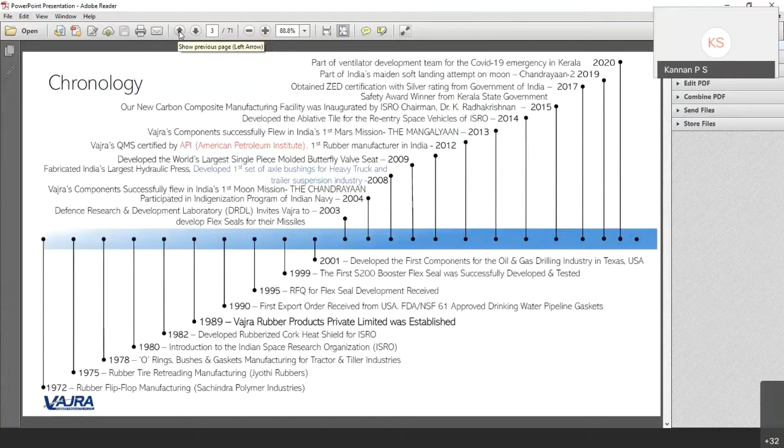Then we graduated into making bigger items, metal-to-rubber bonded items, like that. Two to three years passed, and we got an opportunity to develop something nobody had ever done before — what we can call a flexible seal, which was being imported from Europe at the time. Finally, our company managed this over about 4 years, and after that we could do what we can do now.

So that was a big thing for our company — showing that things can be done. Even when we were making chappals, my father had this belief: whatever you do, you should do it with passion and full confidence, and try to do it the best. That's what took him to the next level of trying to make components for aerospace.

Now I can proudly tell you, our GSLV rockets and PSLV rockets are all fitted with our components — without them, none of these launch vehicles can fly. So that is one component.

Now we are into different components in that launch vehicle altogether — some hundreds of components we are making. But that was the main start, making the special flex seals for that. Also, taking cues from aerospace, even our missile industry in Hyderabad, the Abdul Kalam Center for Missiles — we work very closely with them too, and there also these seals are required to give direction for our missiles, like Akash and different kinds of missiles. So now we almost cater to 21 different types of missiles, ballistic and intercontinental missiles — these are all fitted with our components.

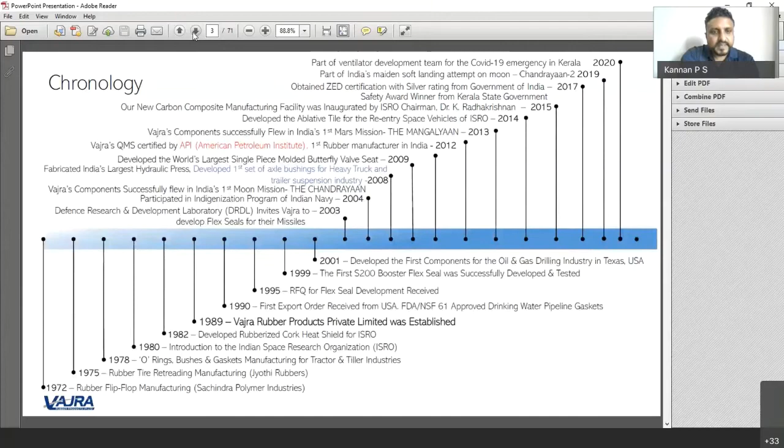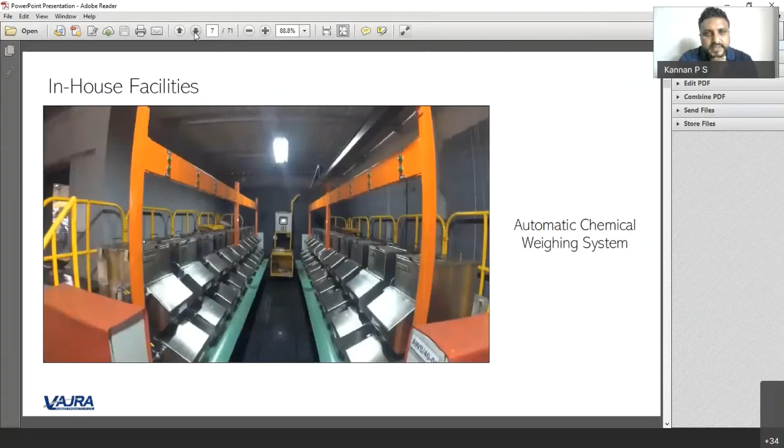Next one, please. This is basically a mixing mill, where you mix the compound. So I always compare this mixing technology to a mother's kitchen. This is where you incorporate different chemicals. That is where the expertise comes in, where rubber board could be of big help. So this is one heart of a rubber unit.

But when you are starting a small unit, you don't need to have a mixing mill in-house. You can start just by having a molding machine, then invest later, because there are people who sell only compounds. Different compounds can be bought, and you can just manufacture with them. So this could be something which you invest in at a later stage, and smaller machines are also available.

So this is that mixing—like a mother's cooking, you mix certain special ingredients to get those properties. So that's a mixing mill for a dry rubber industry, which is very important. Next slide please, ma'am.

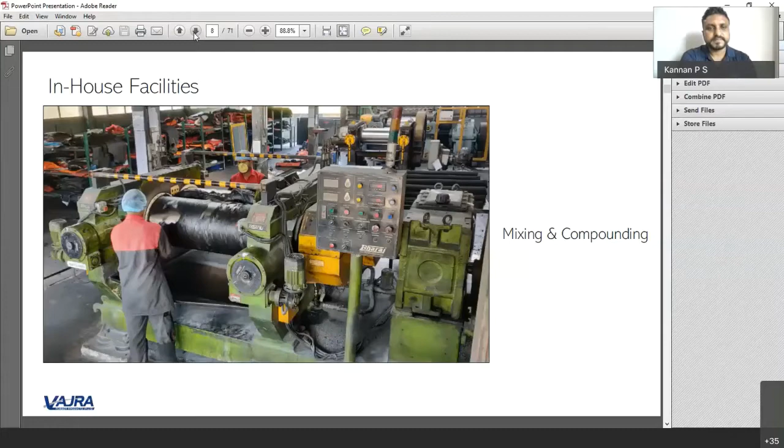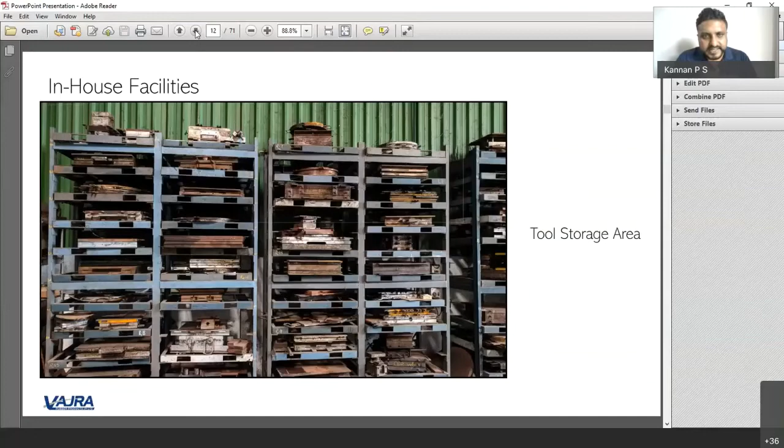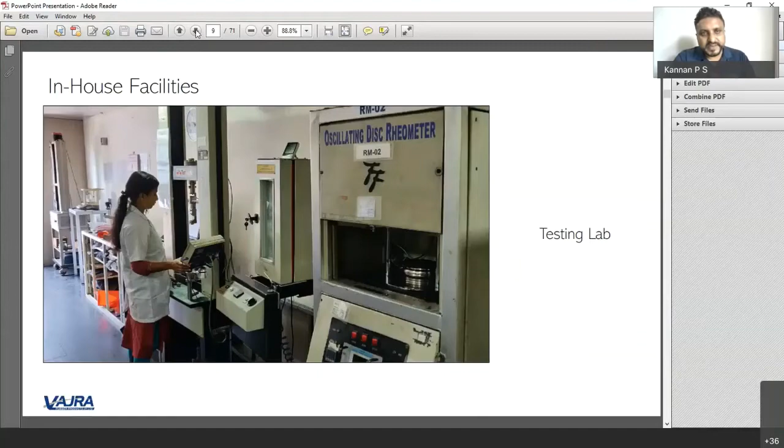Okay, this is a different thing. Yeah, in-house facility. Next one, yeah, see, tool design.

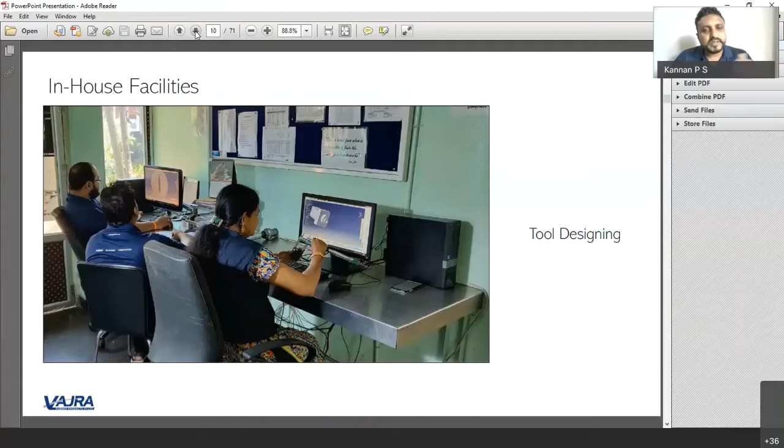When you start an industry, you should look out for who could be your partners. One is a technology partner, and that could be the rubber board. They will guide you on how to do these certain things. Then you need allied industries near you who can make tooling for you and do your main work.

Then you could do your transportation, maybe even packing. You can hire people to pack. That will bring down your cost. Having everything in-house is good, but in the initial stages that is going to be difficult. So when you start an industry, you should make friends with all these kinds of allied industries in your area.

Instead of investing in a lathe machine, somebody else will make some components for you, a tool, so you don't have to invest in a tool room. And for mixing again, somebody there could have a mixing unit where you can buy the compound, so you don't have to invest in a mixing mill. As I mentioned, you don't need to invest in these kinds of machineries or anything.

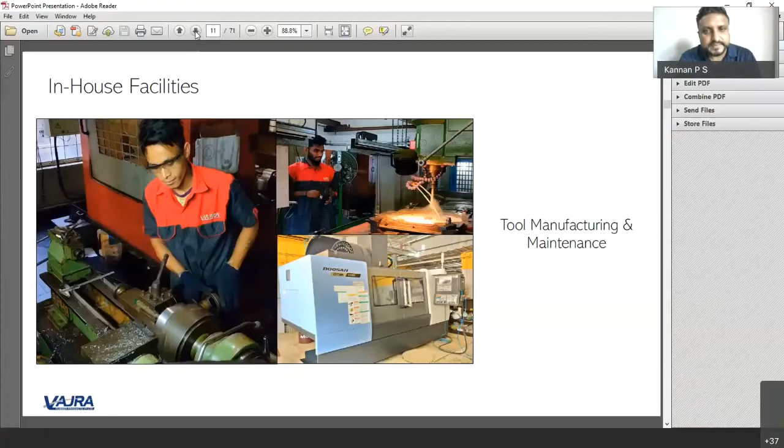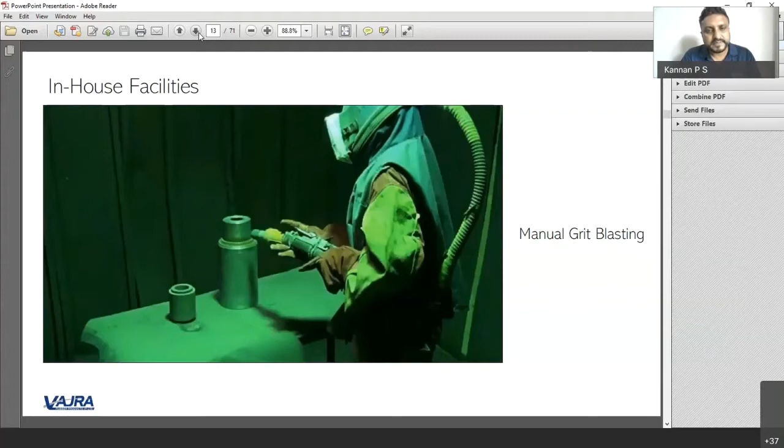These presses vary in sizes, the plate sizes. In our factory, we have presses ranging from 3.8 meters by 3.8 meters to even 12-inch by 12-inch. This photograph shows the different range of hydraulic presses. So what I was suggesting is that you can invest in one or two smaller machines like this and start a rubber industry. This is just to give you an idea of what I am talking about.

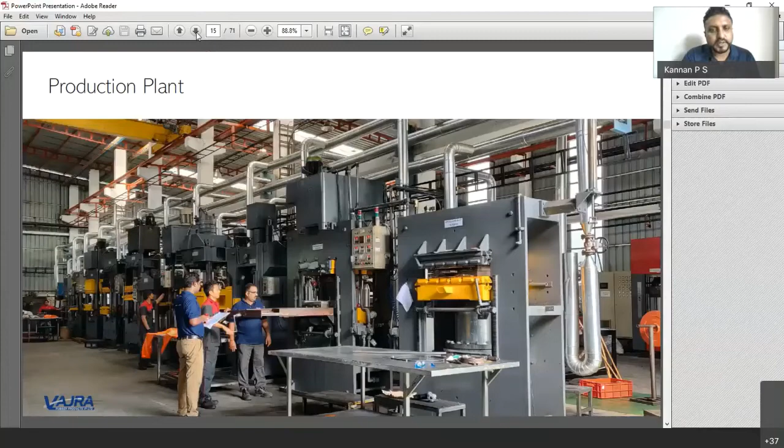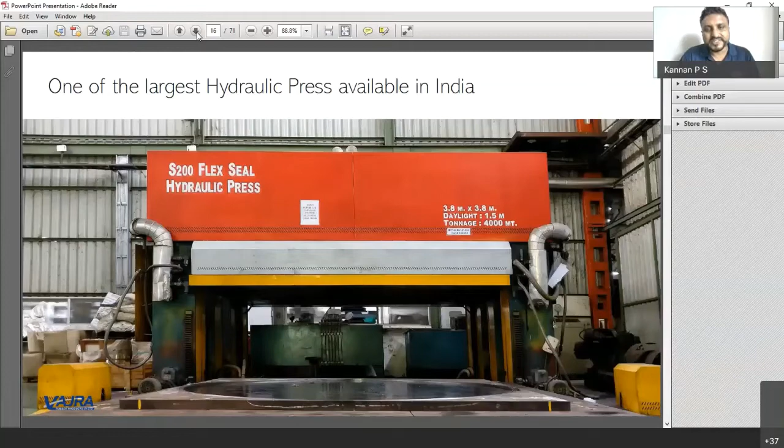Next one, please. Yeah, this is the big press I was talking about. This is actually India's biggest hydraulic press, 3.8 meters by 3.8 meters in size. So just for your information, this big press is used to make our products for ISRO, the rocket seals and all, which I mentioned. This is all manufactured using this machine. So this machine has done a lot of good for our nation. Next one, please.

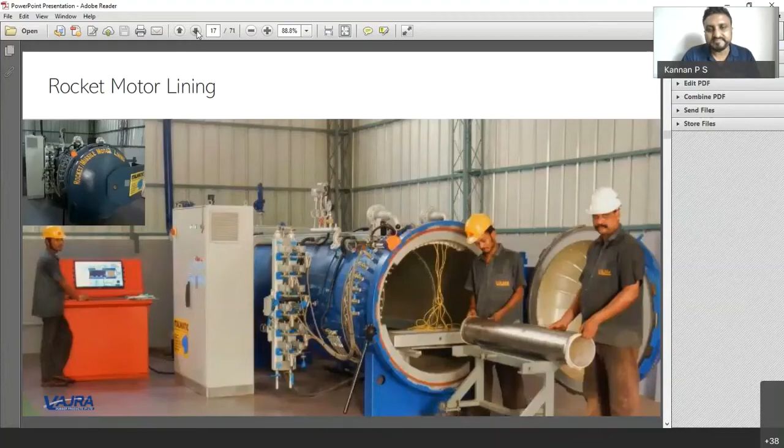Again, in dry rubber, it's not only molding — there is also an autoclaving method. In this picture, the tube you see inside has a white color, which is actually a special kind of rubber. That tube is actually a missile motor. Motor means tube — you line it with a special rubber, then fill it with solid propellant, just like our Diwali rockets, where you fill the paper tube. Similarly, a missile has a tube made of metal, which you line with rubber and put the solid propellant in, then ignite it and it goes up. So it's all simple technology — there is no rocket science in rocket science. When you break it down to smaller things, this is one of the components of missiles, and this also can be done. So we are doing this. Next one, please, ma'am.

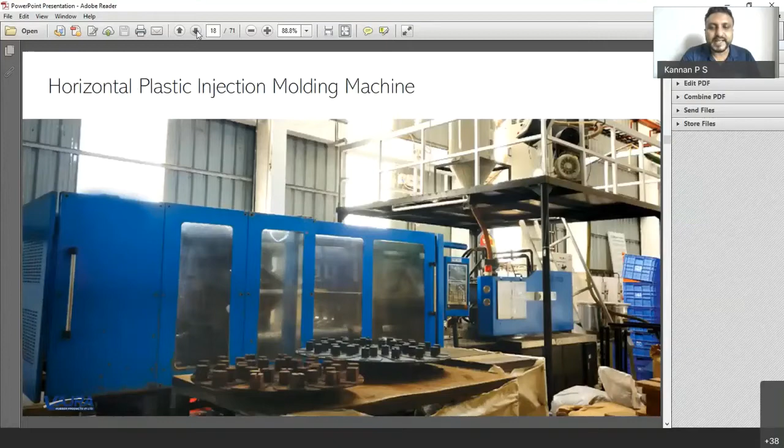This shows one of our plastic injection molding machines. This is a horizontal injection molding rubber machine, which is a very high productive item. This machine is particularly used for making O-rings. We have some clients where they require 1 lakh O-rings per day, and using a small or compression machine, it is very difficult to make that kind of quantity. So we have invested in this horizontal injection molding machine, where up to 1 lakh pieces of O-rings can be made.

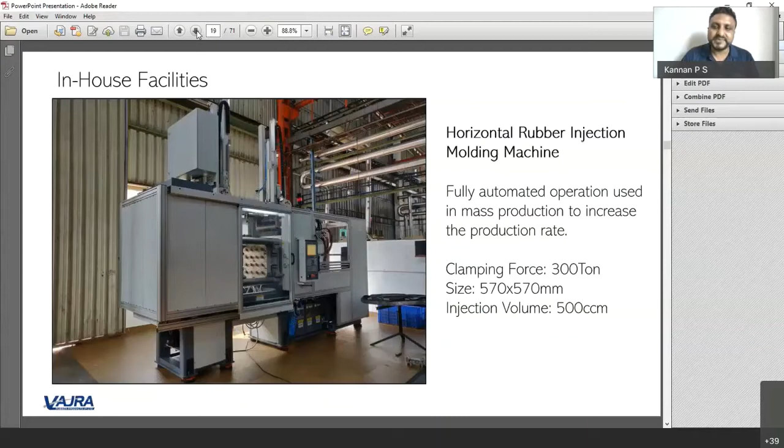All these things you can attempt as you graduate in your career.

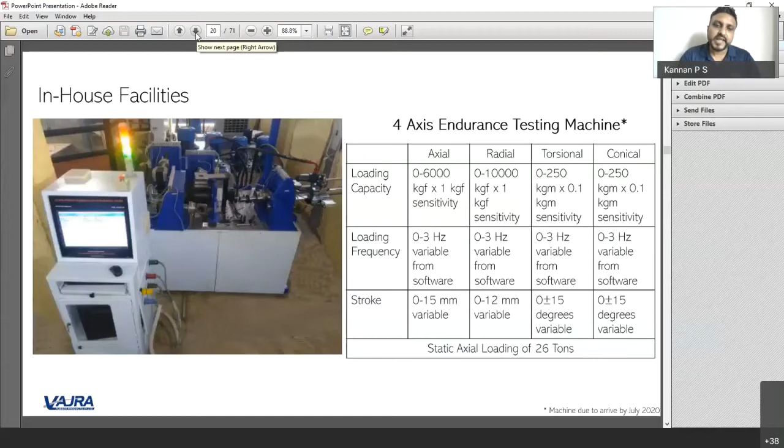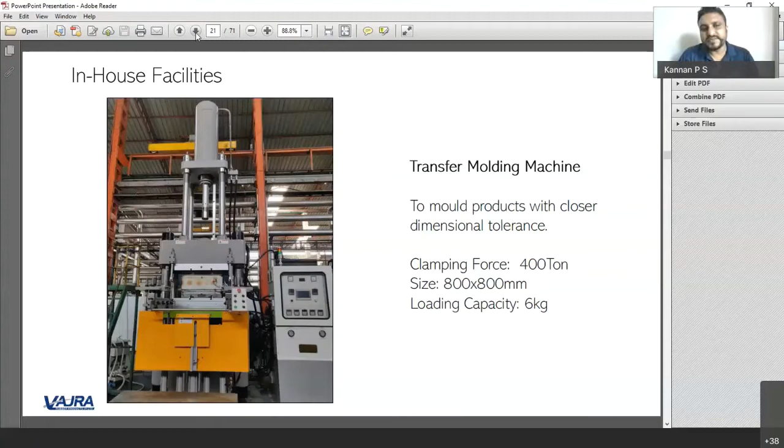This is a different kind of machine called a transfer molding machine. It's in between compression molding and injection molding. Here, you put the rubber on the top cavity and just push it down, so it spreads. It's a specific molding machine.

This is an automatic O-ring inspection system. When you make 1 lakh O-rings a day, you cannot segregate them with your eyes. So we have a machine where you just put the O-rings in, and by video measuring, it finds out which are good and bad. It automatically segregates good and bad and also counts them, so afterwards you don't need to count manually. It will tell you, for example, you have 1,20,000 good and maybe 100 bad, and segregate and give them to you. That's stuff which you might require in the future.

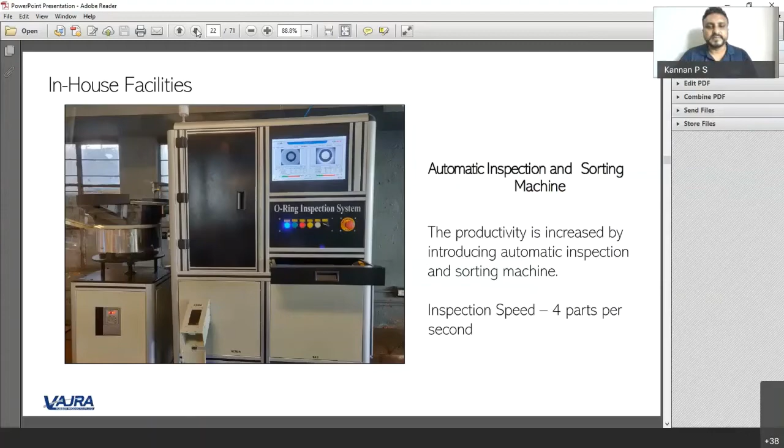This is the trimming department. Any rubber product you make will have some extra rubber on the sides, so you can either trim it with a grinder, cut it off with scissors, or use a blade. This picture shows how we trim it using a roller and a pneumatic grinder.

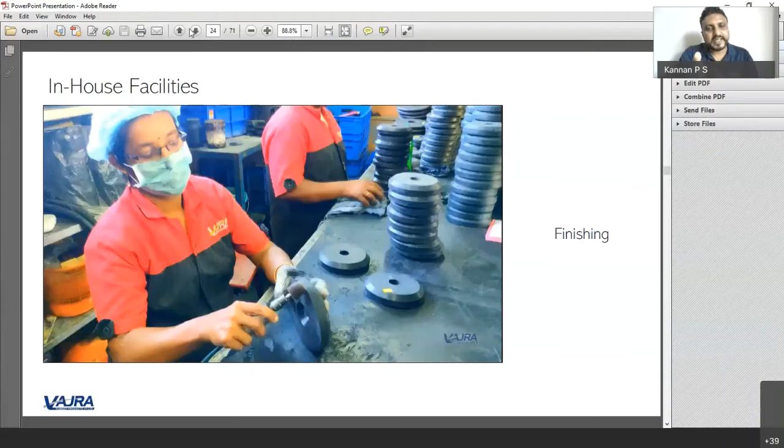We have our own maintenance department. Since we have some 60 to 70 different hydraulic presses and other mixing mills, a department handles the maintenance in-house, which is an advantage because we don't have to depend on outside help. These things can be established as we graduate, so yes, we have an in-house maintenance department.

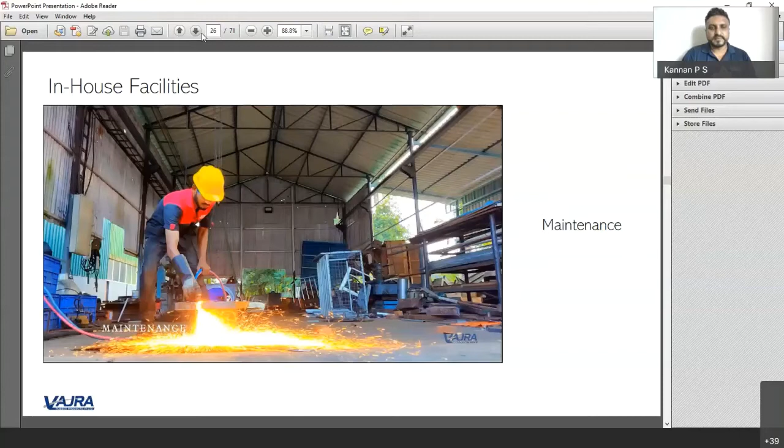This shows some of the products which we make for defense, aerospace, submarines, and military tanks. It's too difficult to explain each and every one, but these are some of the components.

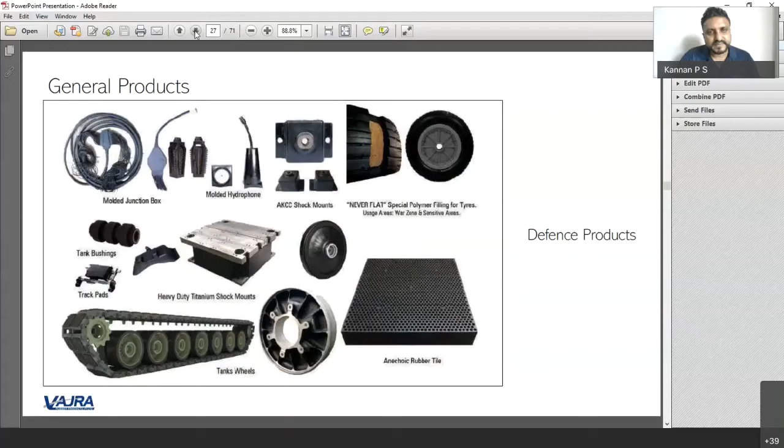Again, some oil and gas consumable products which we manufacture.

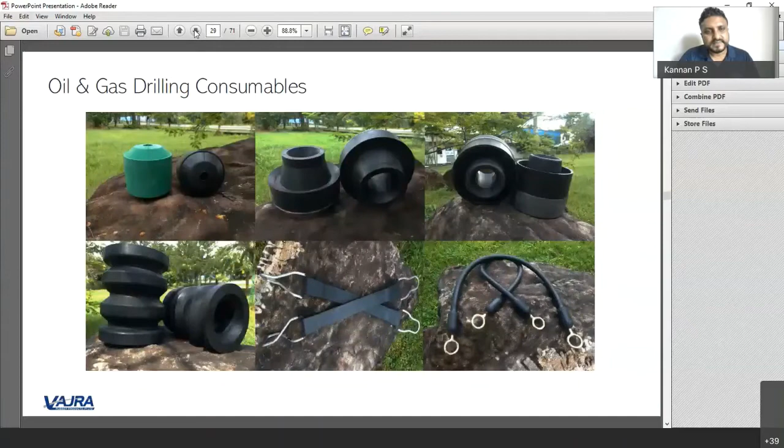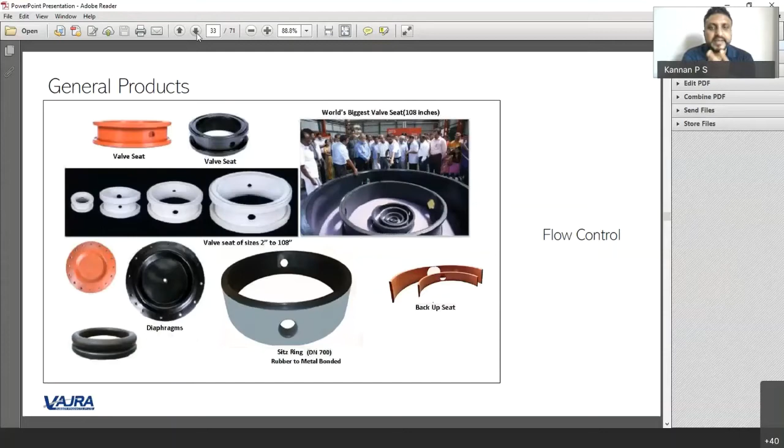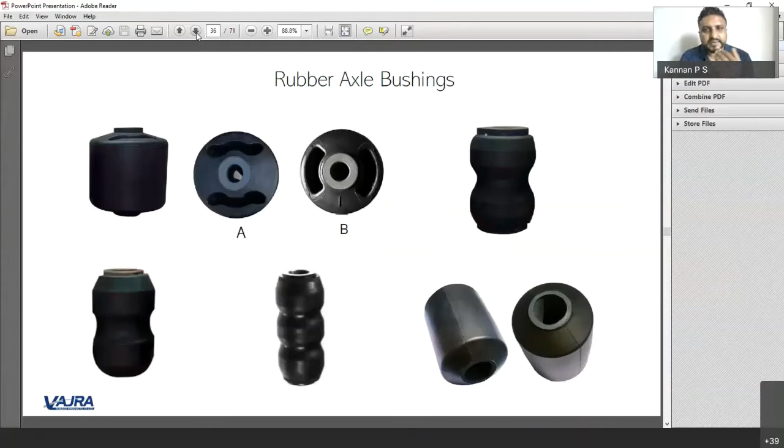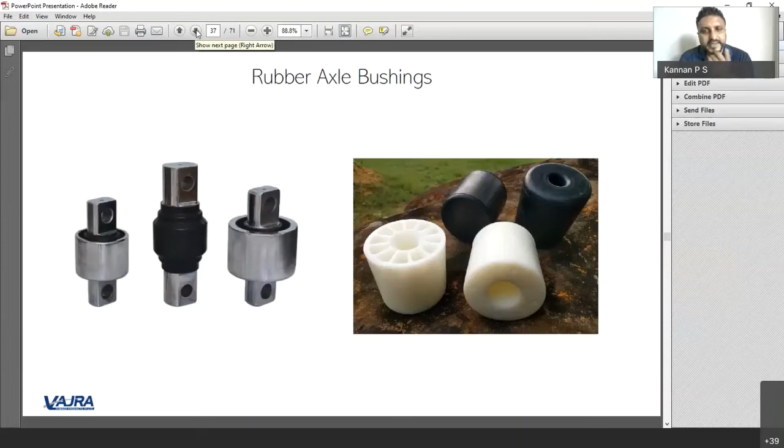Again, some general products for heavy automotive. This is again, different bushes and other components for automotive. Next one, please. Okay, different tests.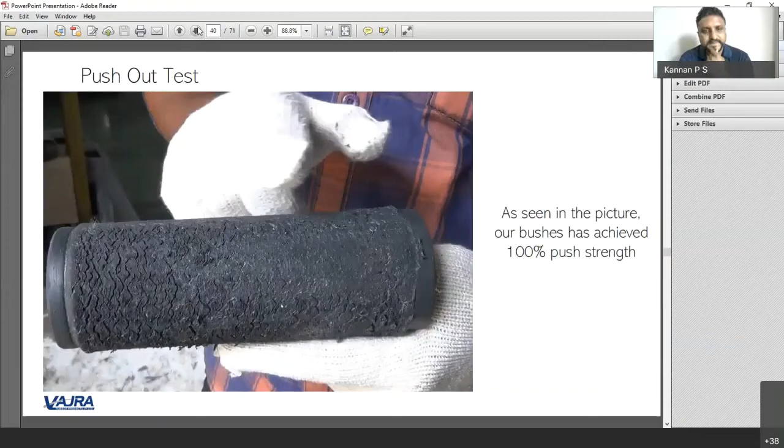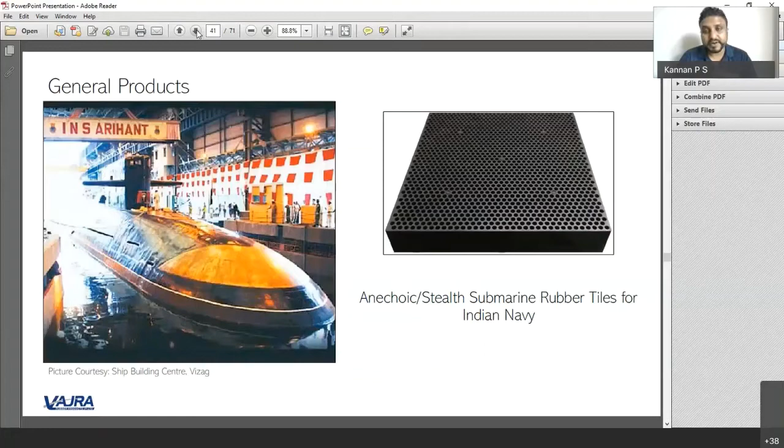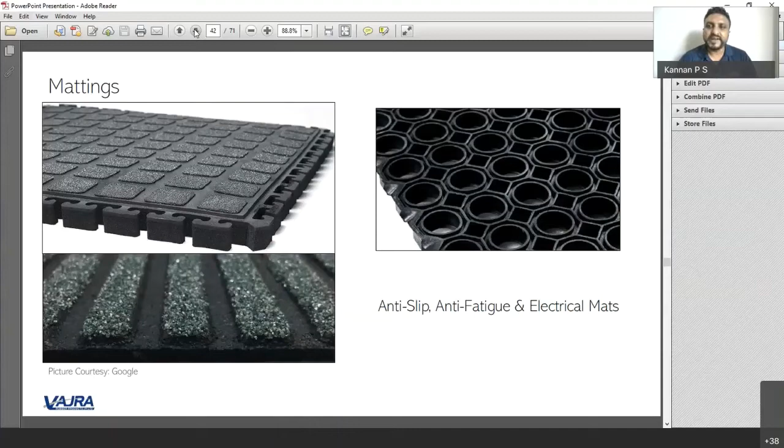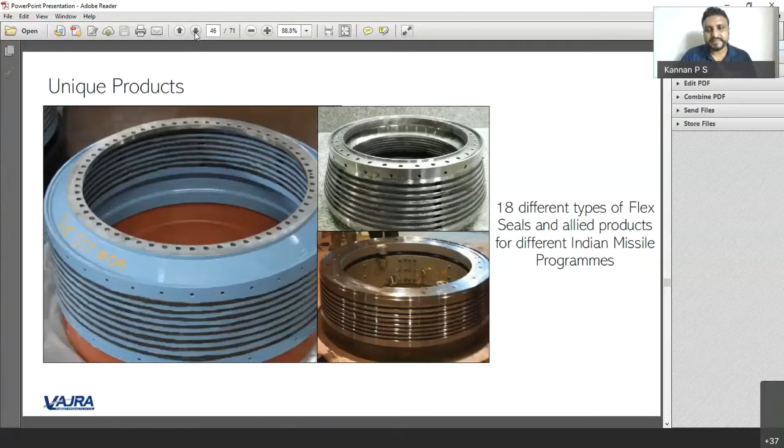As I mentioned, I have noted 18 different Flex Seals for the missile industry. Now that number has gone up to 21. We make the same components for 21 different Indian missiles. Again, I can proudly tell, without our components, none of our missiles can take off. So that's the kind of responsibility we are taking on our shoulders to make sure that the Indian defense, everything is in the right place, and everything is supplied to the best quality.

Again, that shows another flex recently molded. Actually, this has been identified to go into the Gaganyaan mission, so that's a special one. That's why we have shown that photograph.

Again, some different critical components for ISRO.

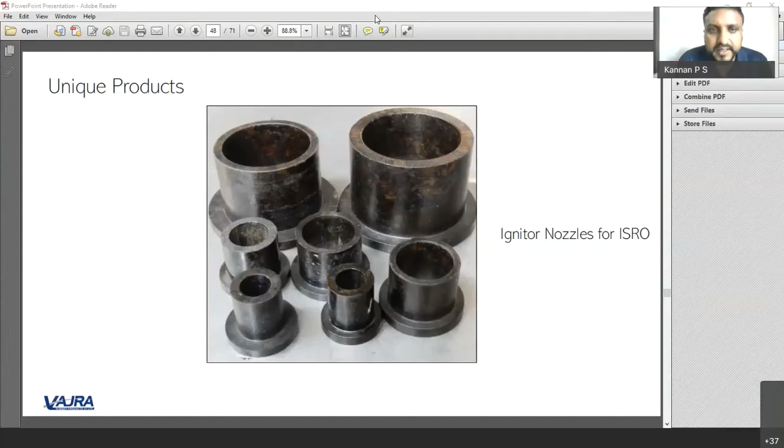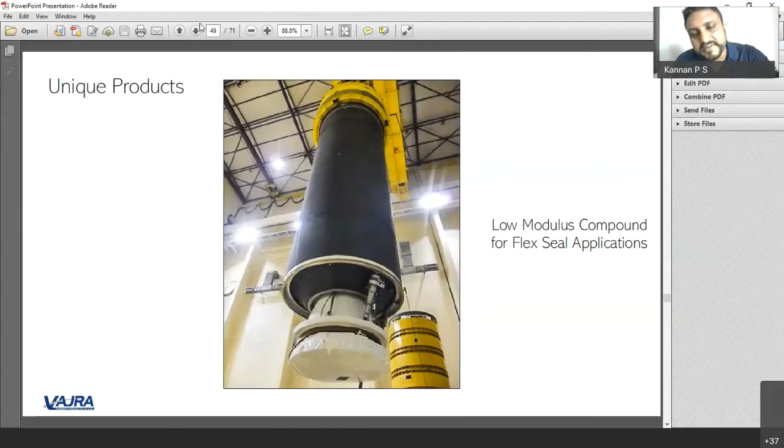I'll go a little slow. Again, this one shows a rocket component which we make. These are all. This picture shows where our flex seals are fitted.

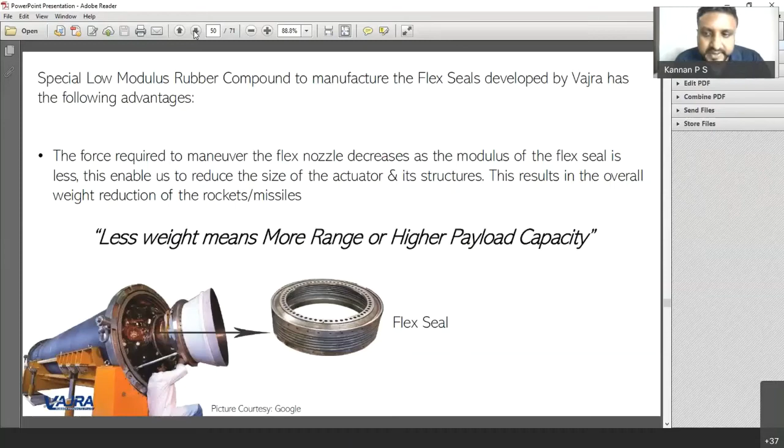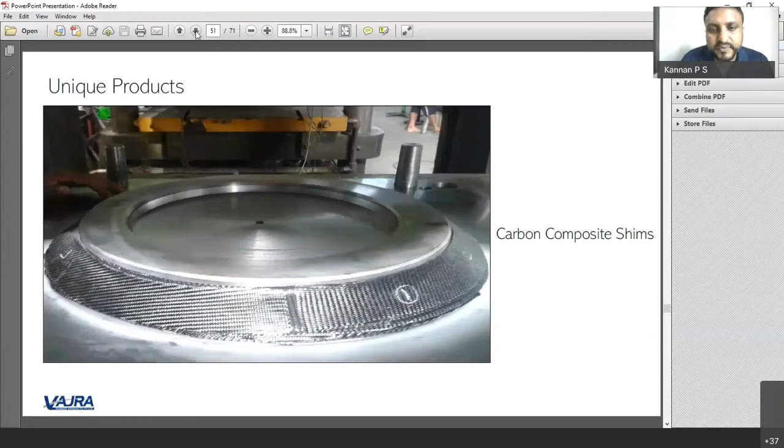Other than rubber, we also make carbon composite, that means components made using carbon fiber or carbon fabric, which are used to reduce weight. Especially in aerospace and defense industry, weight reduction is very critical. When a rocket is being lifted off from Earth, to lift off 1 kg of matter, the cost is around $30,000, roughly 21 lakhs. So if you reduce 1 kg of a rocket, you are actually saving 21 lakhs. So we have invested in this technology to convert metallic components to carbon composite, where the cost of these rockets can be reduced.

I think you must be aware of this lady, Kalpana Chawla. She was one of our Indian-born astronauts, a US astronaut, who lost her life because one of the tiles which protects the incoming module got dislodged, and she got vaporized. So the tile which we have actually developed for ISRO is for our human in space program.

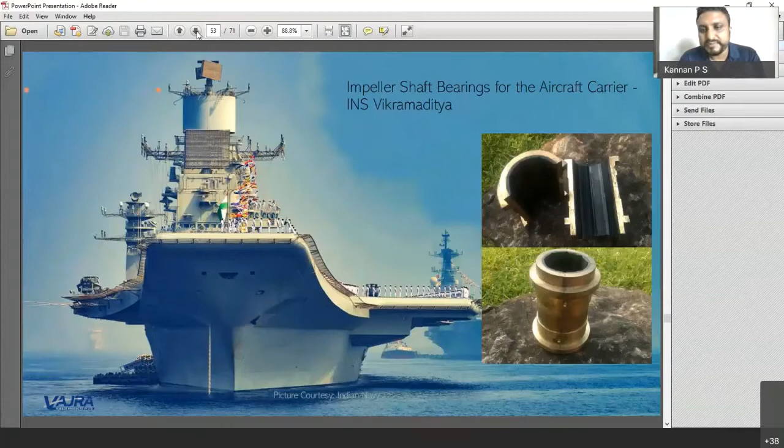It shows some of the components which we have supplied for our aircraft carrier, very very critical components, which was only made in this aircraft carrier, Vikramaditya, which we bought from Russia. They were charging some 1 crore rupees or something for that bushing. We developed it for like 2 lakh. So big savings.

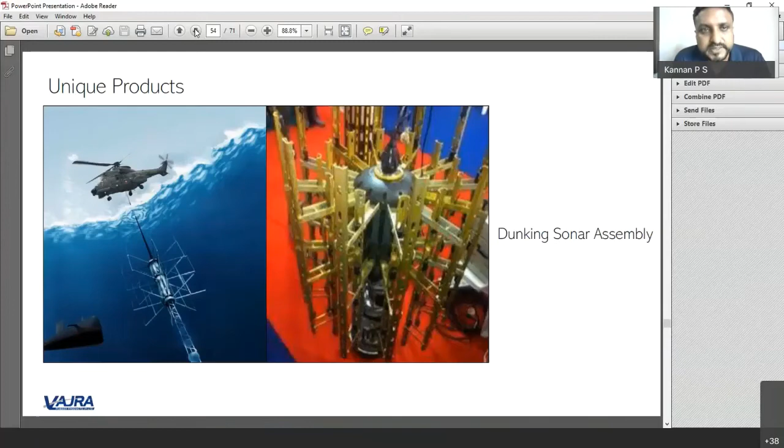Again, carbon composite components - even if it is carbon fiber, this can be made using our same compression molding machines. So multiple uses for the rubber molding machine. These are components which we made for the Navy, lightweight because it has to carry it on a helicopter, which is used to find submarines in the sea. Again, these components are also made of carbon composite, but made using a rubber molding machine. This is all missile components, adapter blast tube, which is called, used inside the missile.

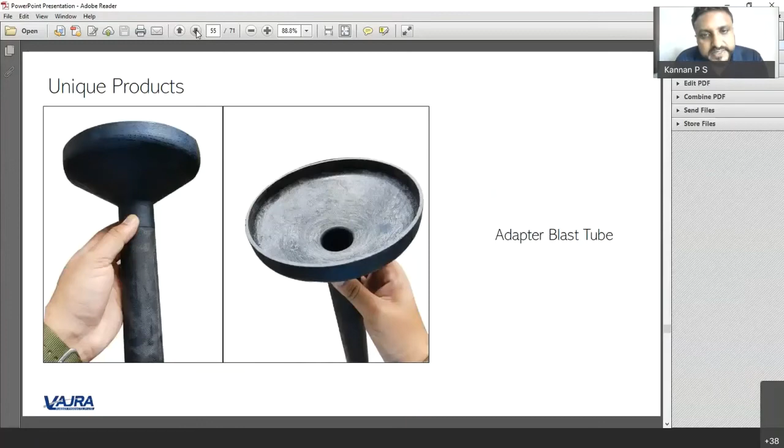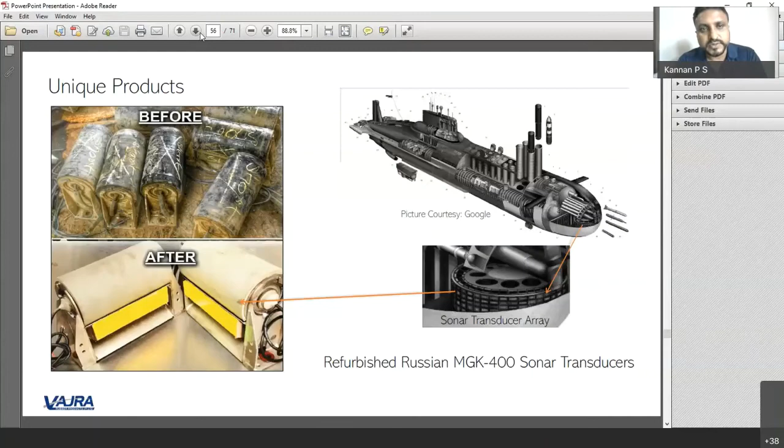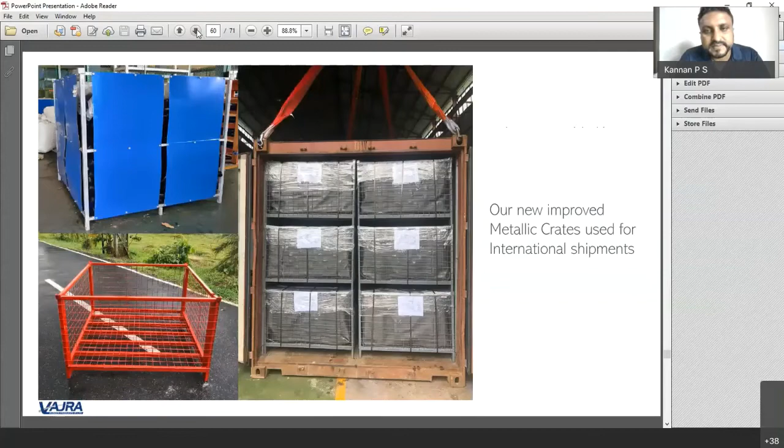The biggest disadvantage for myself was I never got a chance to work outside. Just like my father who started in industry, I also joined my father. So this is my first job and probably my last job. So we lack the experience of the outside world. And even though I'm giving you advice, maybe I'm not the correct person to give you advice because I never worked outside.

Everybody needs somebody to look up to. When you are the boss, sometimes you don't have anybody on top of you, so you get lost. So it's always good to have somebody to advise you. It could be your friend, it could be your teacher, somebody should be there. So at an industry level, always get advisors. You should always be ready to learn from other people. That is something which we are always trying to learn from others.

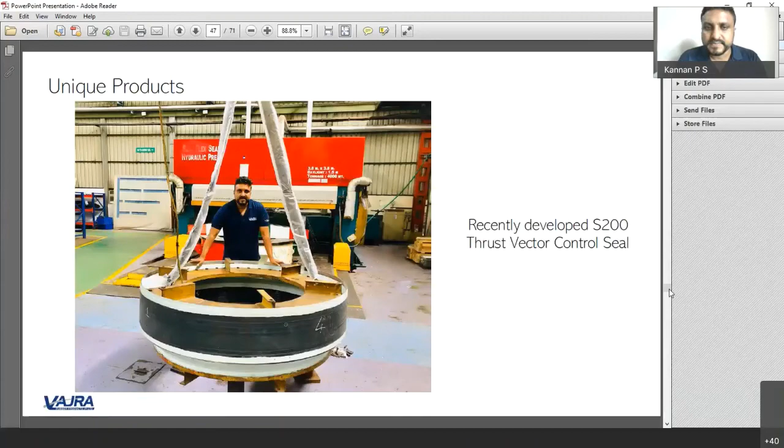Hello, yes, hello sir, can you hear me? Yes, I can. Mazur, right? Yes sir, first of all thank you for your best positive thoughts.